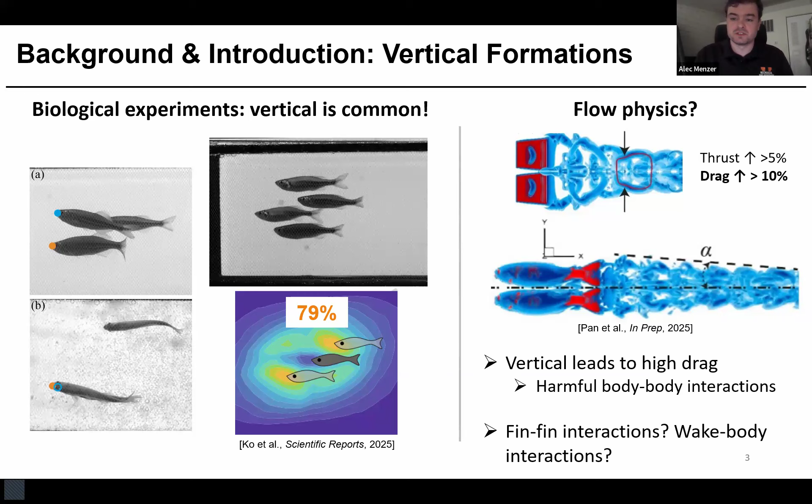And so right now it's still unclear how the vertical formation can be utilized by fish to improve their hydrodynamic performance. And this close vertical formation yields a lot of interesting potential findings related to the interactions that these fish can leverage. For example, interactions between close-by fins constituting fin-fin interactions, and the interactions between upstream generated wakes and downstream fish constituting wake-body interactions, to give just a few examples.

So for some of our objectives, like I had mentioned, a lot of the research that's been done on fish schooling has focused primarily on horizontal planar formations. And in particular, the horizontal planar diamond has sort of emerged as one of the benchmark formations for studying the kinds of interactions that fish can utilize for benefits in a schooling environment.

Dating back as far as 1973, Danny Weihs looked at this sort of leader, left, right, follower formation, where a leader is flanked by three fish in this diamond configuration, to look at various different effects related to the channeling effect, for example. And some other work recently has looked at this leader, left, right, follower formation too in a much denser configuration to understand the wake-body and body-to-body interactions.

But up to this point, the vertical diamond or diamonds in the vertical plane have not received much research interest, despite the fact that in the horizontal plane, this diamond formation has really served as a benchmark for studying the interactions. The diamond has not been leveraged in the vertical plane for this same reason.

But just like the planar diamond, we have a similar formation. For example, we have a leader fish, which is flanked by three downstream fish. The only real change here is that there's a top and bottom position rather than a left and a right. And this video is in the supplementary materials of the paper, taken at the Lauder Lab at Harvard.

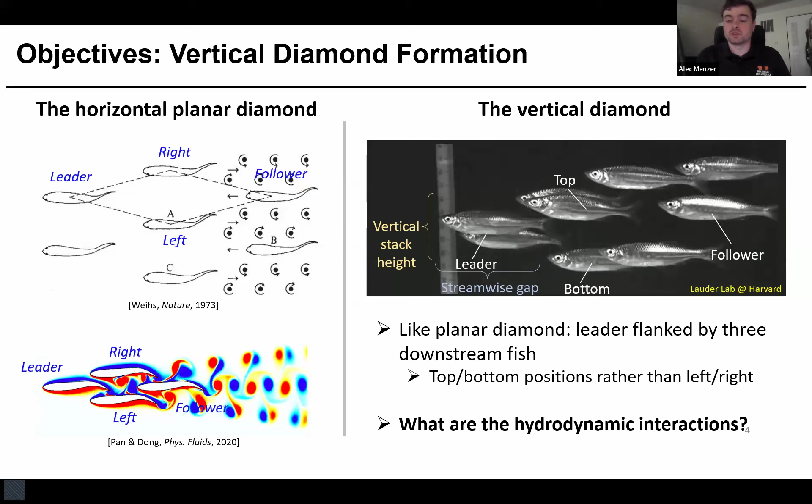And just like how this horizontal planar diamond is really used to study the formations in the horizontal plane, the main question that we hope to answer is, are there hydrodynamic benefits? And if so, what are the hydrodynamic interactions that are responsible for this performance change of fish in vertical diamonds?

So to study this sort of vertical diamond formation, we look to the experimental videos to get an inspiration of how the vertical diamond might look. And so just like I mentioned for the horizontal planar diamond, we have a leader fish flanked by three downstream fish: the top, the bottom, and the follower. And this formation, just like in the planar formation, is controlled by the streamwise distance and the vertical stack height, analogous to the lateral spacing between the left and the right fish.

And we're mainly concerned right now with changing the vertical stacked height because as of yet, the effect of these vertical spacings on the hydrodynamic interactions in schools is not yet well understood. So our main focus is to understand the effect of this vertical height on the interactions. And by changing this vertical height, we hope to extract some information about the changes in the wake interactions and performance changes.

And as fluid dynamicists, we also want to know, are these interactions, if any, relevant across a range of Reynolds numbers, including biologically relevant Strouhal numbers or Reynolds numbers for these giant danio fish that we're studying in this work. This is the computational model of a giant danio. And in laboratory experiments, in their more relaxed swimming scenarios, they reach Reynolds numbers between 6,000 to 10,000. So these are relevant Reynolds numbers for the giant danios at the higher end of the spectrum. But the main analysis occurs at a Reynolds number of 4,000.

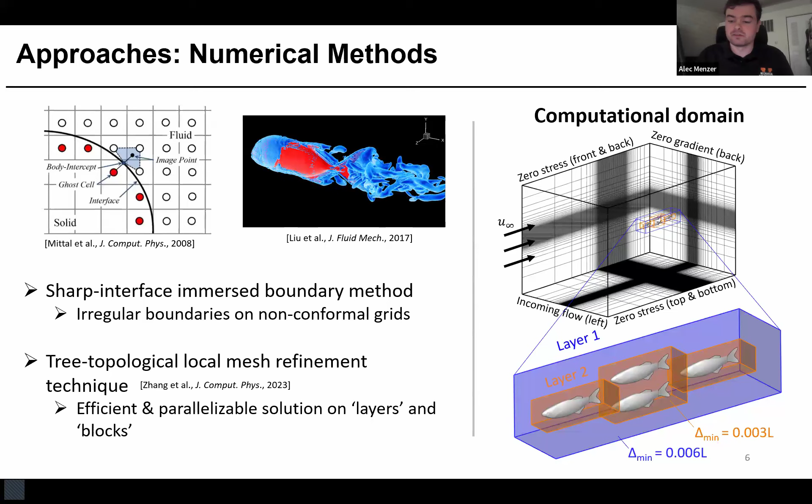And to further improve the efficiency of these calculations, we use a tree topological mesh refinement technique where we can efficiently, in a parallelizable method, solve the governing fluid equations, which are the incompressible Navier-Stokes equations, on these layers and blocks that we partition the domain up into. And using this technique, we reach a very fine grid resolution within the innermost layer of 3/1000th of a body length being the grid size. So this was sufficient for resolving the flow features and the forces at the Reynolds number that we've selected.

And looking towards the drag, with decreasing vertical spacing, there's a major drag decrease experienced by the follower fish, while the top and the bottom fish are less impacted. So in this second vertical diamond that I've labeled VD2, which is the smaller vertical spacing, the drag is decreased by more than 15%.

So this is really helping us to motivate and understand how we are going to analyze this problem. And what we want to focus on is what is responsible for these large force changes that are causing high thrust on the caudal fins of the top and the bottom fish, and really low drag on this follower fish. So looking at the fin, the fin-body, and the wake-fin interactions in these schools.

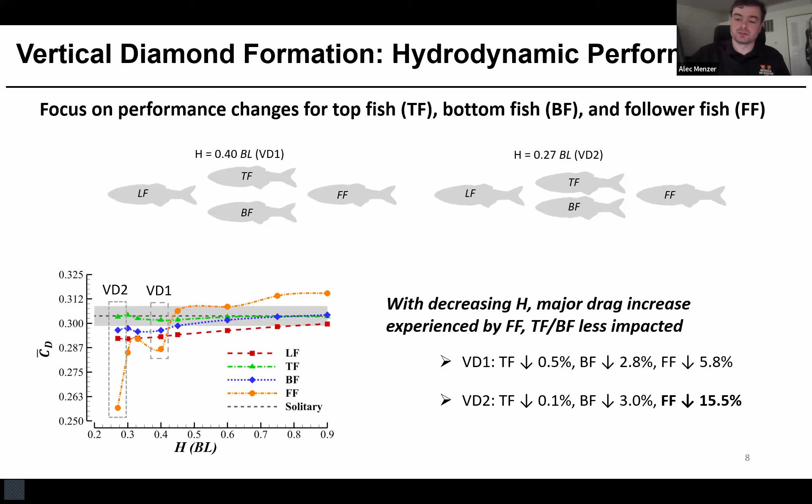So when we look at the differences in the wake formation, one thing that really jumps out is the difference in the trajectory of the vortex rings, where we see that there's this vertical compression of the vortices around the body of the follower fish. And because the top and the bottom fish are closer together, the vortices generated by the leader overlap with the heads of the top and the bottom fish.

So if we look at the regions of interest for this, in region 1, we see that there's this overlap of the leader's vortices with the head of the top and the bottom fish. In region 2, we see that there's this really closely packed caudal fin arrangement where the follower is just downstream of this, and the compressed vortices eventually interact with the caudal fin of the follower fish.

So we're really concerned with understanding how this leader stacked fish interaction is improved in the lower vertical spacing vertical diamond. And we're also concerned with how this span-wise compression of vortices is impacting the drag and the thrust of the follower fish. So how do these complex wake structures first interact with the head of the follower fish?

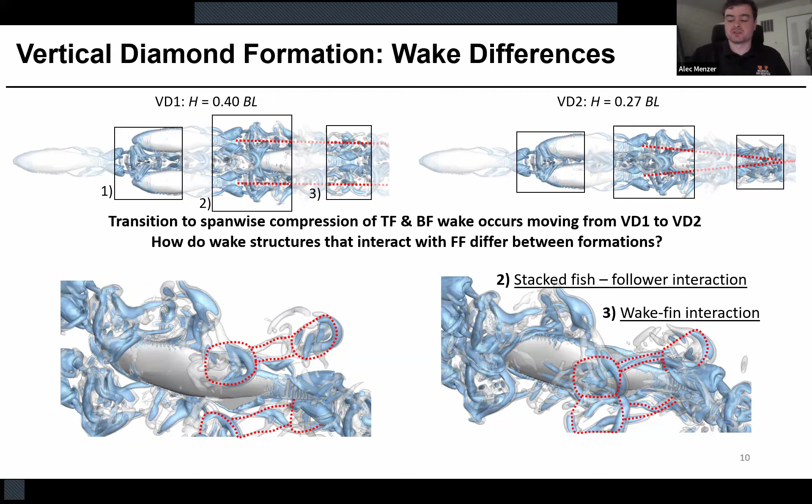So we can see that these two vortex rings that are formed by the top and the bottom fish really hug the body of the follower fish on both the left and the right sides. And as they convect further downstream, they compress around the caudal fin of the follower fish. So we also want to understand how this wake fin interaction is facilitated and improves the thrust. So these are the three main vectors we're going to pursue through the rest of the presentation.

So for this wake stacked fish interaction, what we're mainly looking at is the drag of the top and the bottom fish, which did decrease just a little bit in the second vertical diamond with low vertical spacing. In previous studies, this really dense vertical stack actually increased the drag of these fish.

But here we're finding that actually the leader fish's wake is much more capable of improving the drag when these fish are close together. And this leader fish's wake low pressure is counteracting any of the pressure that builds up in front of the fish and actually produces a pretty strong drag reduction periodically as the wakes are passing both between and directly alongside these fish.

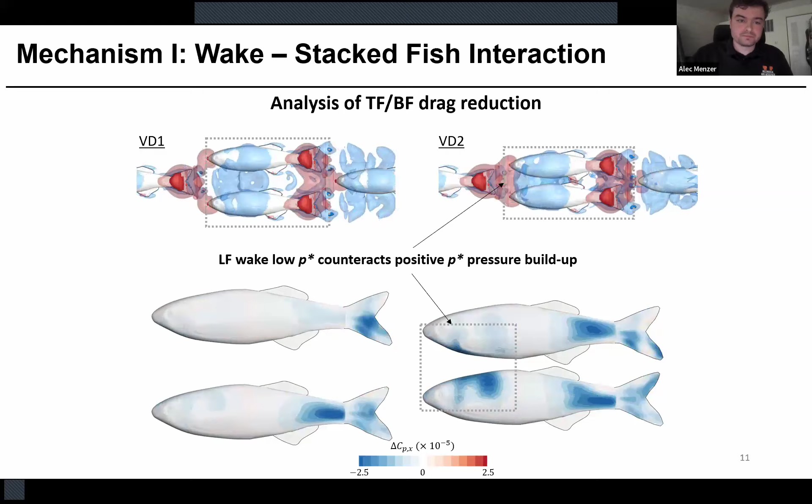And here we're looking at what's responsible for the thrust increase of the top and the bottom fish. This is also related to some work done by Yu Pan in his PhD dissertation. Here we're finding that when these two fish are really close together, the caudal fins, when they're flapping from left to right, for example, here, these leading edge vortices are very close together in the vertical direction.

And so these oppositely signed vortex regions are generating a strong jet between them, which is increasing the velocity gradient and in turn increasing the circulation and the strength of these leading edge vortices, which is directly responsible for the thrust of these two fish. So these stronger wakes are generated because the smaller vertical spacing is able to improve the fin-fin interaction of these fish.

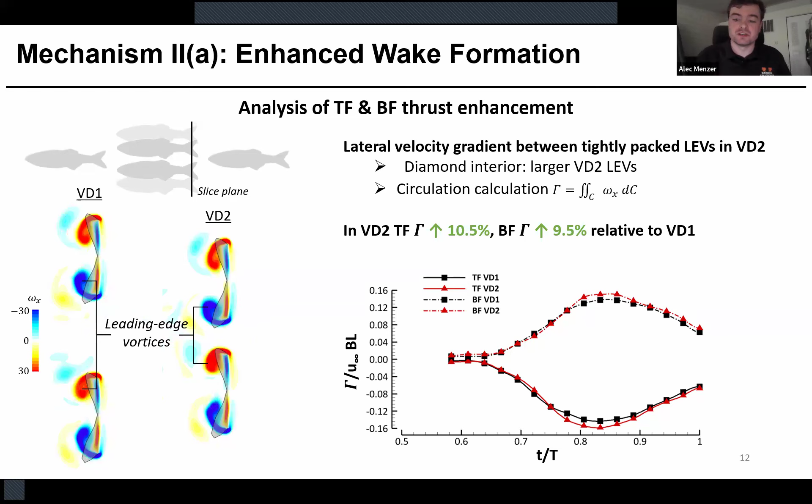As these enhanced vortices generated by the top and the bottom fish travel downstream, of course, the forces and the pressure distribution of these vortices is greatly impacted. So here we're looking at the follower fish drag reduction. In vertical diamond 1, where the two fish are further apart vertically, these vortices, which are the very dark blue regions right on the caudal fin at this time instance here, are pretty far apart and the pressure gradient is not as high.

You can see that the regions of low pressure are less intense than on the right, where these enhanced vortices on the interior of the vertical diamond are generated and enhanced through fin-fin interaction of the top and the bottom fish. And furthermore, these vortices are also very close to the follower fish's body, so their impact on the pressure force is much greater.

So if we look at the pressure force vectors on the bottom half of the screen, we see that in VD1, the pressure force vectors are relatively weak in magnitude, whereas in vertical diamond 2, because these vortices are enhanced by the fin-fin interaction of the top and the bottom fish, and also because the vertical distance between the vortices and the follower is lower, the pressure force can be much more oriented in the upstream direction as opposed to vertical diamond 1.

So not only are we getting anterior positive pressure annihilation just because these vortices are so close to the follower's body, we're also getting a lot stronger suction force on the lateral surfaces of the fish body.

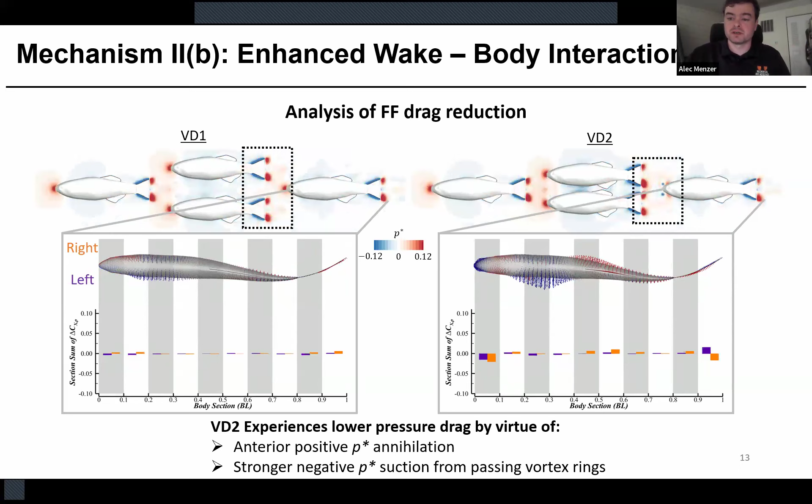So these are both improving the drag of the follower fish. But something that was really interesting about this formation is that actually the pressure drag reduction occurs as well as a shear force reduction. So the shear drag experienced by the follower fish is much lower than that of solitary swimming, which is very surprising.

And actually, we find that in this very dense vertical formation, vertical diamond one, excuse me, these are actually reversed. So vertical diamond two should be the top icon, vertical diamond one should be the bottom. Here we see in vertical diamond one, there's this sort of local drag wake generated right where the anal fin of the top fish and dorsal fin of the bottom fish are sort of meeting each other. So these two median fins, those are drag producing structures.

And as a result of those fin-fin interactions, this local drag wake is extending downstream to interact with the body of the follower fish. And actually it lowers the free stream velocity that's experienced by the follower fish, which in turn is helping to reduce its shear drag. So there's a sort of a dual contribution of the pressure force via vortex body interaction, and also the local drag wake formed between these top and bottom fish in the lower vertical spacing diamond formation.

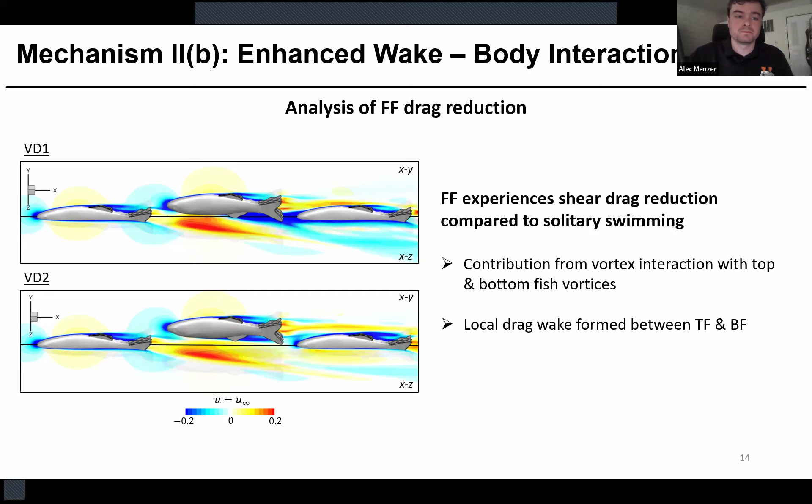And finally, we turn towards the back of the follower fish, having identified that there's an enhanced wake body interaction between the top fish, the bottom fish, and the follower fish. Now we want to figure out how are these compressed vortices interacting with the caudal fin of the follower fish. And we already saw how they were compressed around the body and sort of were on a trajectory to meet the follower fish's caudal fin as they were compressing in the spanwise direction.

And here we identify a very complex array of vortices in which the connecting vortex, which is sort of bridging between the left stroke vortex rings and right stroke vortex rings of the top and the bottom fish, they're positioned directly above the forming leading edge vortex. And you'll notice that the sign of the vorticity is opposite. And so this is forming a very strong lateral velocity jet, which is sort of feeding the strength of the leading edge vortex early in this half stroke motion.

And so we can compare the size of the leading edge vortex in this early period of the half stroke, for example, this time instant. The leading edge vortex is already forming. And also the connecting vortex is sort of interacting with the dorsal fin vortex to directly position it alongside the growing leading edge vortex. And this is helping to position the vortex better for an interaction of opposite sign vorticity regions, generating a stronger velocity jet, which is improving the circulation very early in the half stroke.

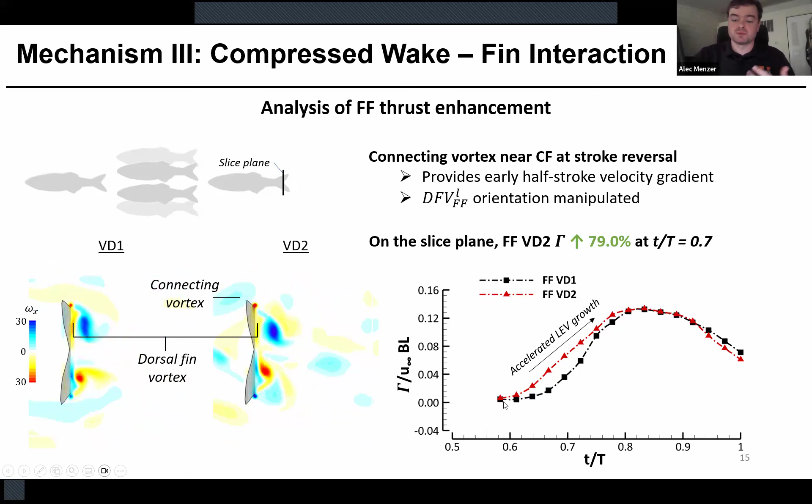And we can see that compared to the follower fish in the sparser vertical diamond, the follower fish in the very dense vertical diamond has much more accelerated leading edge vortex growth. And so here we're just looking generally at the Reynolds number effects, and we find that across a wide range of Reynolds numbers, the thrust is enhanced in vertical diamond two compared to solitary swimming. And so we can find a lot of the same interactions of fin-fin vortices and the wake-fin vortices here.

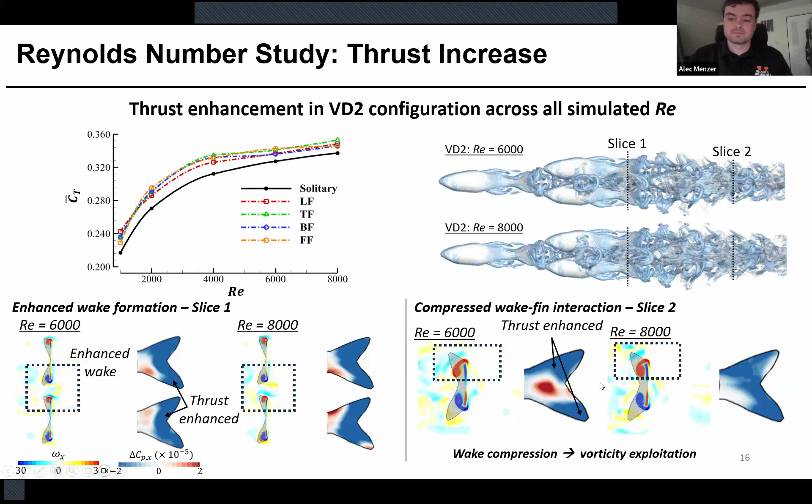And finally, we're looking at the drag, and the drag reduction is also apparent across a range of Reynolds numbers, including the biologically relevant Reynolds number of 8,000. And we can look towards the pressure distributions and find that these low pressure regions that we identified in the original study are present in the higher Reynolds number cases of 6,000 and 8,000.

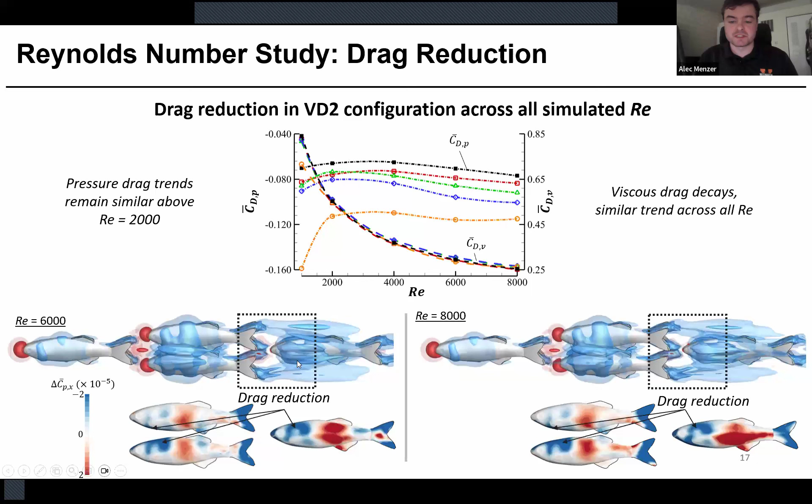And so here, for the vertical diamond interactions, we find that the benefits are sort of distributed across the school within denser vertical diamonds, and it's all related to the decrease in the vertical spacing. So the decrease in the vertical spacing allows the stacked top and bottom fish to counteract the pressure buildup that would otherwise occur without a leader fish, and this helps to reduce the drag acting on these two fish.

Also, as a result of this lower vertical spacing, the fin-fin interactions are improving the thrust of these two fish by more than 5%. And these fin-fin interactions are producing enhanced vortices, which is leading to a wake body interaction with the follower fish, reducing its drag by more than 15%. So there's a dual effect of this lower vertical spacing of a vortex body interaction that is benefiting the follower. And also it's reducing the pressure in front of the follower fish too.

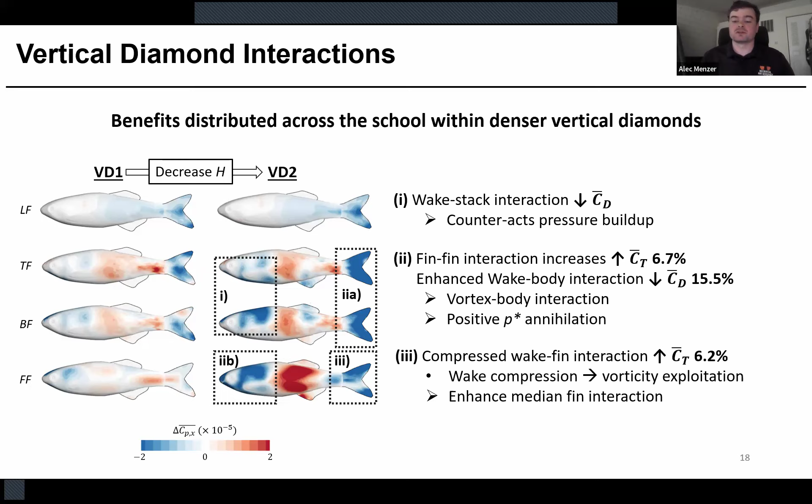And finally, as a result of this lower vertical spacing, we get this really complicated vortex interaction where the spanwise vortices are sort of compressing towards the caudal fin of the follower, leading to a vorticity exploitation mechanism that's enhancing the overall thrust of the follower fish as well, increasing its thrust by more than 5%.

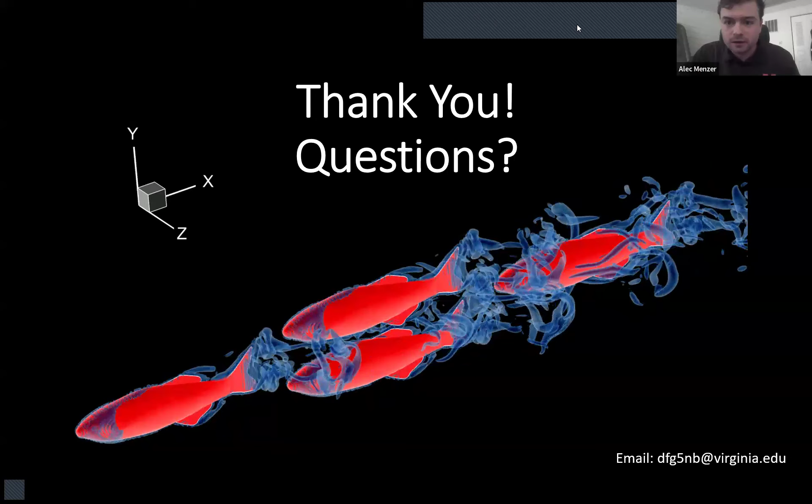Ali Karimi asked: can the pressure difference between two vertically aligned fish in a fluid generate a propulsive hydrodynamic interaction between them? Yeah. So for this, the fish are all constrained to remain in the same positions, and we're mainly just benchmarking the forces experienced by these fish. But those vertically stacked fish do tend to be not repelled, but attracted towards each other, because there's a lowered pressure region in between these two fish.

Right now, some of the work we're doing is looking at how to station hold in these kinds of vertical formations. So it would generate an attractive force between them, yes, but we're hoping to understand the stability and the free swimming nature of these formations as well.

And next question, maybe a little bit biological: what determines the rank, leader versus follower? Mainly, I would say from a fluids perspective, whoever is experiencing the incoming flow first. Typically in the diamond formation, the leader is getting the least benefit. It's generating the flow disturbances that can be extracted for benefit by downstream fish.